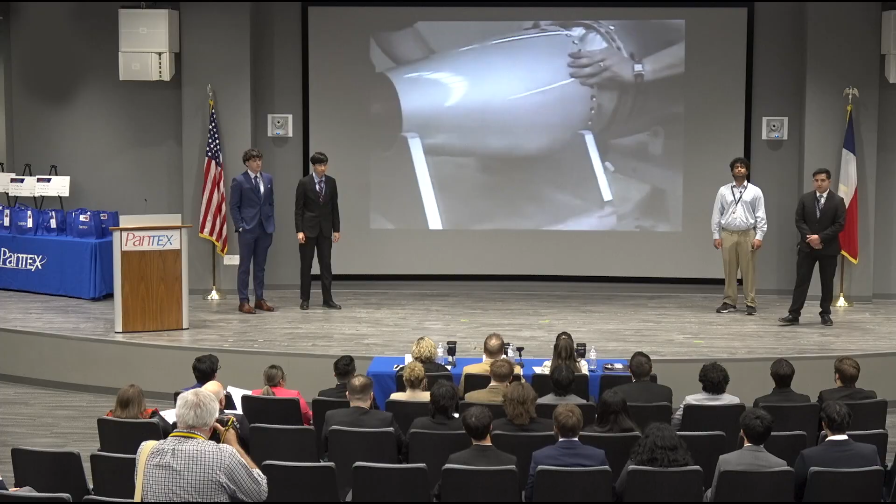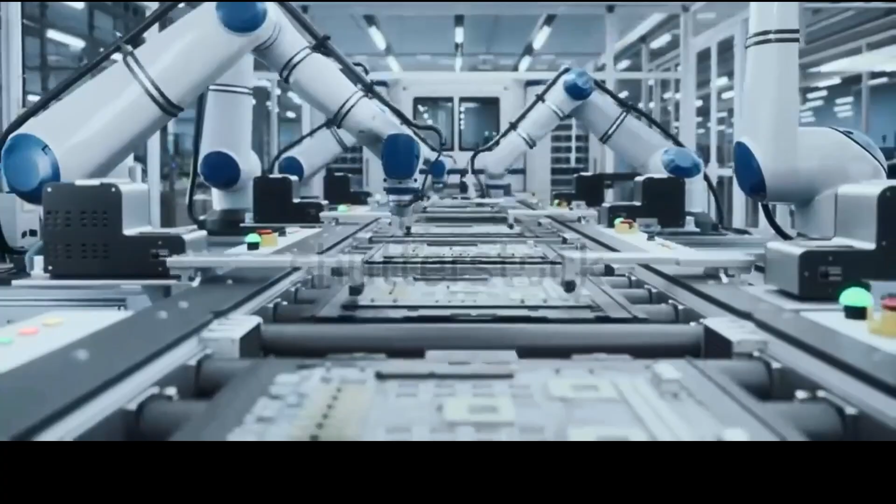Handling high explosives is one of the most unforgiving tasks in the defense industry. There is no margin for error and no second chances. For decades, factories relied on human hands, but even the most skilled operators are still human, slow, repetitive, and prone to error. Humans can only work so fast and with limited accuracy. Even minor errors create bottlenecks, delay production, and limit efficiency. But what if every step could be faster and flawless? Today, there's a better way to protect both people and mission continuity without compromising on control, accuracy, or accountability. Introducing the robot arm. It's a modern way to handle repetitive work in the manufacturing process with unmatched speed, accuracy, and consistency. Our system outpaces human labor, automating movement, minimizing errors, and streamlining workflow for maximum efficiency. The result? Faster production, fewer mistakes, and optimized output that means your team stays in control from a safe distance. Remote operation, full telemetry, instant shutdown, zero exposure, with maximum reliability. Whether your mission is stockpile stewardship, warhead life extension, or final dismantlement, automation doesn't replace the expert. It extends their reach and preserves their safety. National security demands innovation that's not only smart, but safe. You've always protected the nation. Let us help protect the people who protect it.

Howdy. My name is Matthew Valdez. My name is Mohammed Omar. I'm Adrian Montero. I'm Robert Robles. And I'd like to introduce you to Aura, the autonomous unmanned robotic arm.

Whether you're designing high explosive ammunitions or sending up rockets suborbital, you usually want to make sure there's extra safety so you're not risking extra human lives. The issue is an increase in safety usually means your efficiency can start to decrease. What if I told you it didn't need to be this way? What if I told you Aura brings a system of autonomous robotic arms that not only maintains your safety standards, but exceeds them, all while multiplying your efficiency and production rates threefold?

Now, what might a system like this even need to do? Our system, consisting of multiple robotic arms, has many constraints. Number one, it needs multiple fail-safes. For example, if the robotic arm carrying highly explosive material is powered off while carrying it, we need to ensure it doesn't drop it. Second, it must be nationally certified. Third, it needs a dexterous design, meaning it's nimble and accurate. Finally, it needs the strength of at least one human, because that is what it will be replacing.

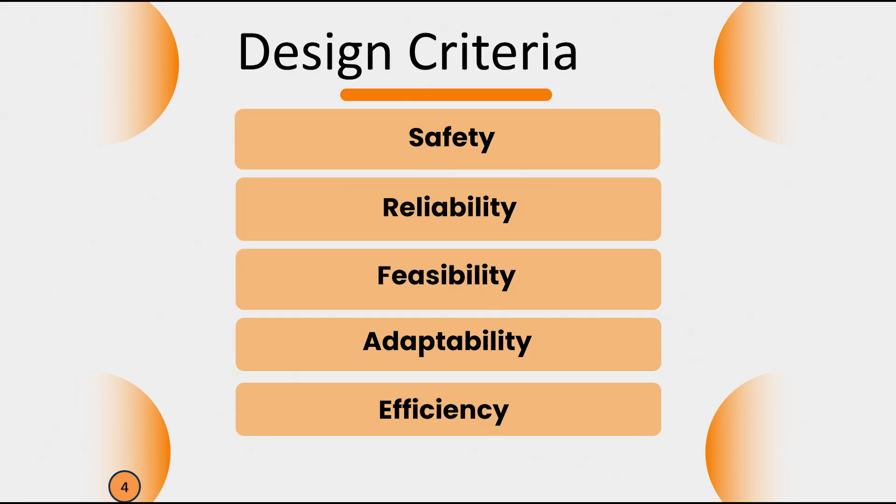So what were our design criteria? Number one was safety, meaning we want to reduce interactions between humans and highly explosive materials, and we're able to get it down all the way to zero. Second is reliability, ensuring these robots can work 24/7, day and night, unlike any human ever could. Third is feasibility, ensuring it's economically viable. Fourth is adaptability, we don't want this in only one part of the facility, we eventually want it in all parts of the facility. And finally, efficiency, these robots will create more parts per hour than any human ever could.

Now let's talk about what Pantex, the integration of Pantex with Aura, and what that could look like on a day-to-day basis at your company.

Our initial plan for Aura is to handle the transfer of raw explosive materials with machines. In this schematic for the floor plan, you can see that Aura has access to the explosive materials and a machine. But before we start with the actual floor plan, we need to talk about how we actually get the explosive materials into the room.

We're aware that Pantex stores raw explosives in barrels on site. So our plan is to get a pallet and load it with the barrels, and then use a human-powered forklift to pick up the pallet and transfer it through the blast door. Then the forklift can leave.

In a maintenance camera, there's going to be an operator always overseeing it, a human overseer, and they'll confirm that no one's in the room. Using a dual authentication system with the forklift driver, they'll both confirm that the room's empty of all humans. The blast door will shut, and Aura can start its procedure.

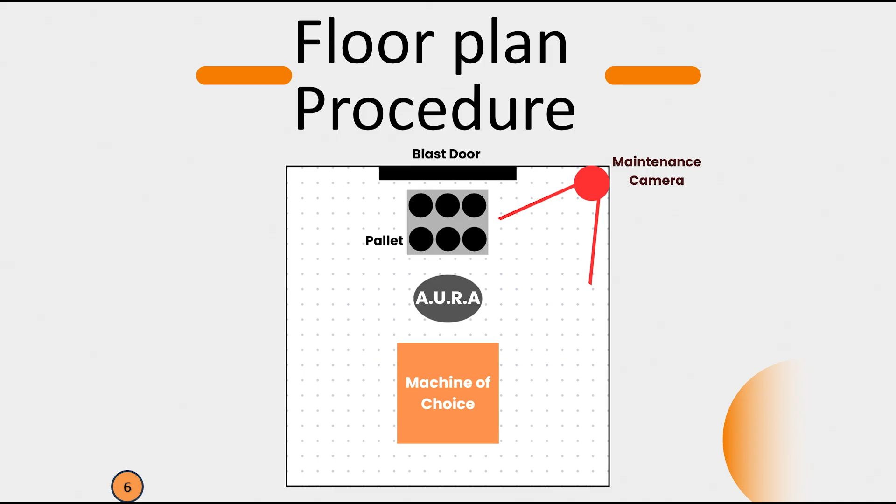Aura will open the lid of the barrel, take out the raw material, put it in the machine, and once it's finished, reload. The overseer confirms each barrel to make sure it's done - kind of like an automatic car wash, with each step being overseen to make sure the procedure is always going smoothly. Then once the pallet's fully complete, the maintenance camera operator will confirm, the blast door opens, and a forklift can remove the pallet and replace it.

The procedure is really straightforward. No human ever interacts with the raw explosives. They're never even in the same room, so it's completely safe.

This procedure can be scaled out, so not just one Aura, but you can have 10, 20, 30, 100. The only real limit is space. And driving out here, we realized space is not probably a huge issue in Amarillo. So the future is really limitless for this.

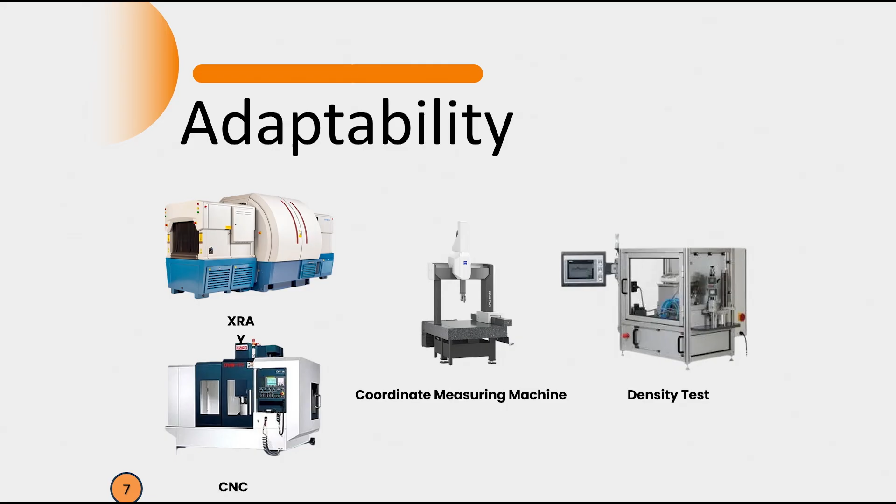You'll notice I said machine of choice. That's because we know Pantex uses a lot of machines, and the same process can be repeated for different machines. So you have your CNC machines, X-ray machines, coordinate measuring, density testing. Any type of machine that Pantex is using can be operated with Aura.

And this isn't just for raw explosive materials. You can also use it for radioactive materials that you wouldn't want humans handling, or dismantling like bombs where you need the precision. We can add multifunctional tools to the Aura arm so that it can do different procedures. We can use automatic transport, such as an automatic forklift that can handle the pallet and place it in a specific place, so you completely remove humans operating that as well.

Because we're handling high explosives, we are going to design the blast room to be nationally certified so it can withstand a blast in case there is an accident. I want to draw your attention here to the increase of safety.

In terms of efficiency, we've spoken with your Pantex experts, and they have said that currently Pantex can develop 50 parts per month. With the Aura system, we estimate, given current industry estimations in other facilities, the part increase can go to 112 parts per month. At each step of the manufacturing of the explosive, we can see a 44% increase of efficiency, which can scale up depending on which sections you decide to automate with Aura.

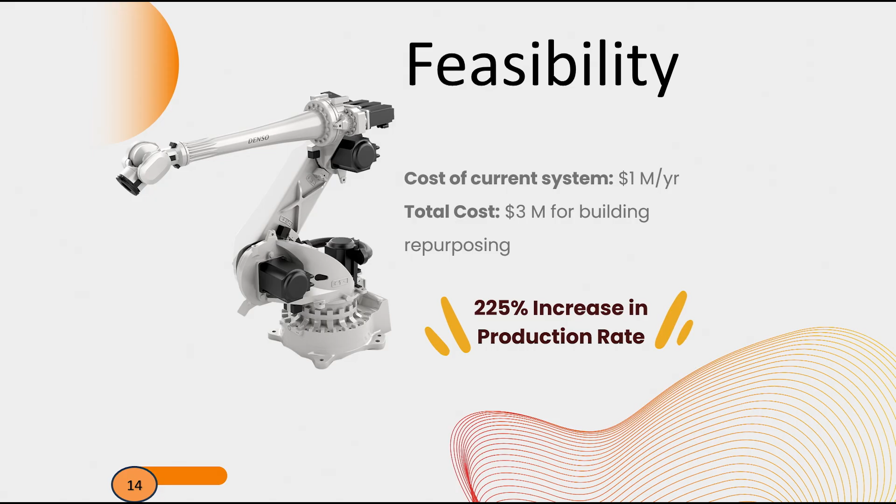Now let's talk numbers. The current system costs Pantex around $1 million per year. Our initial investment for Aura would be around $3 million. While this is a large capital investment, not only would it pay back for itself within 3 years, it will also lead to a 225% increase in production rates.

We've seen that Aura can bring you increase in efficiency, but also adaptability. You as a consumer can choose to put this wherever you'd like, whether it be in the CNCing process or coordinate measuring machine. If you're not comfortable with it being in a step, you do not need to put it there. However, every single step you introduce will increase your production rate more and more. Not only that, there is already an increase in safety and consistency to make sure that no incidents can ever happen with these high explosives.

Now, knowing all of this, I ask you one question: why not Aura?

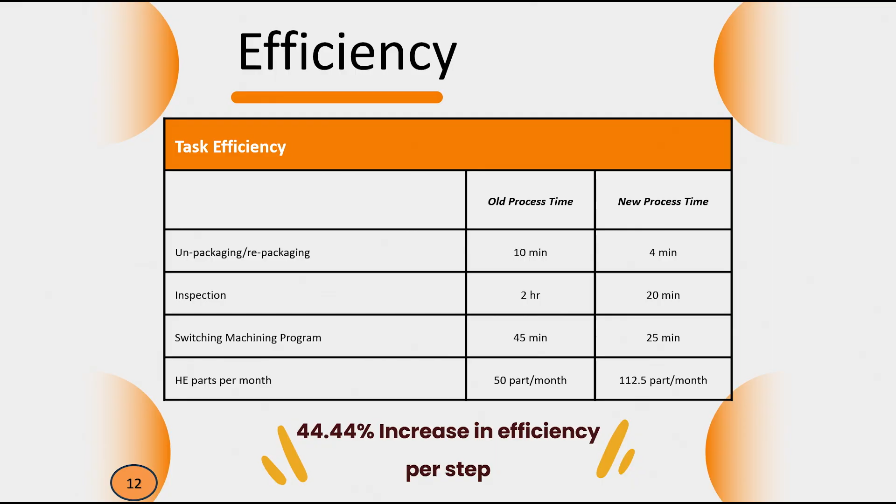So following on that, your presentation talked about an efficiency gain from a time perspective—how do you gain that time efficiency in inspection? Right now the efficiency comes from production; the explosive enters the room, is produced, and the inspector remotely operates a camera to view the part. We accounted for the inspection to be done within the limits of the camera scope. We targeted 4 different steps to look at this 44.4% increase, looking at industry trends from automotive, manufacturing, and food. There were 4 main things a robotic arm was especially good at, and we measured how much it decreased each by. Adding those up gave us a 44.44% increase per step. The inspection gain also comes from accounting for the coordinate measurement machine and density tests—the human doesn't have to unload it, program it, and track down the data, because the machine can be wired to the control panel so the operator can write down the data directly. That way there's no security issue from anything going wirelessly; there's still a cable running from that machine to the person controlling it.

You may have noticed Pantex, except for this building, is kind of old—the facilities are a bit older, so power distribution, electrical, that kind of thing. What are the requirements if you wanted to put more than one in a room? How are you handling power to keep everything up and running—is there a power supply in case you had to operate that way? Well, it can run off of whatever power grid you'd like, or off a generator, and it also has its own built-in battery system in case the grid goes off, though we heard that's not really a big issue. In the event it could happen, it has a built-in backup generator to make sure it can complete its tasks and shut down efficiently without any mishaps.

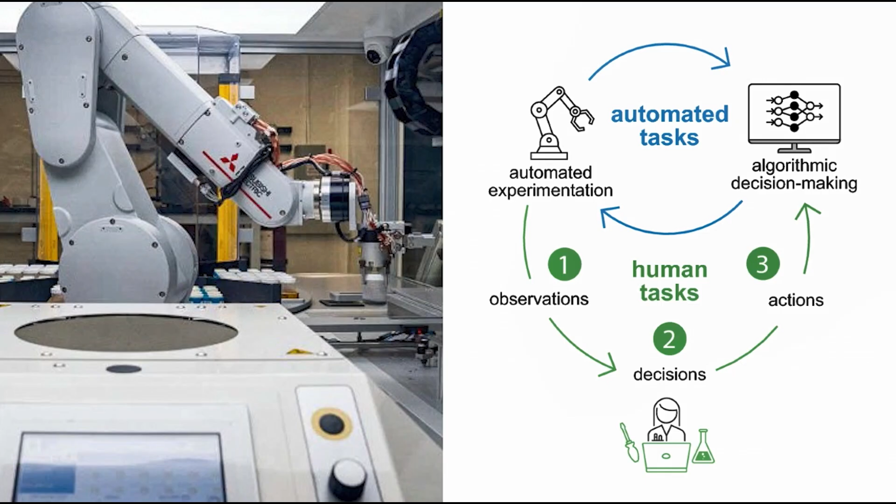We are AutoChem Analytics. Our self-driving laboratory integrates custom hardware and software centered around inline monitoring to optimize your synthetic processes, ensuring a reduction in hands-on operation while increasing the confidence level of your product quality for pilot and industrial scale applications. Our mission is to influence national laboratories to initiate AutoChem implementation into industry standard. AutoChem, let's get in line.

Good morning. I'd like to set the stage for you. Let's imagine that you're an engineering technician working at Pantex. You're working in the high explosives manufacturing unit on the synthesis team. Every single day, you're working hands-on with these batch reactors, and this creates an immediate danger to you.

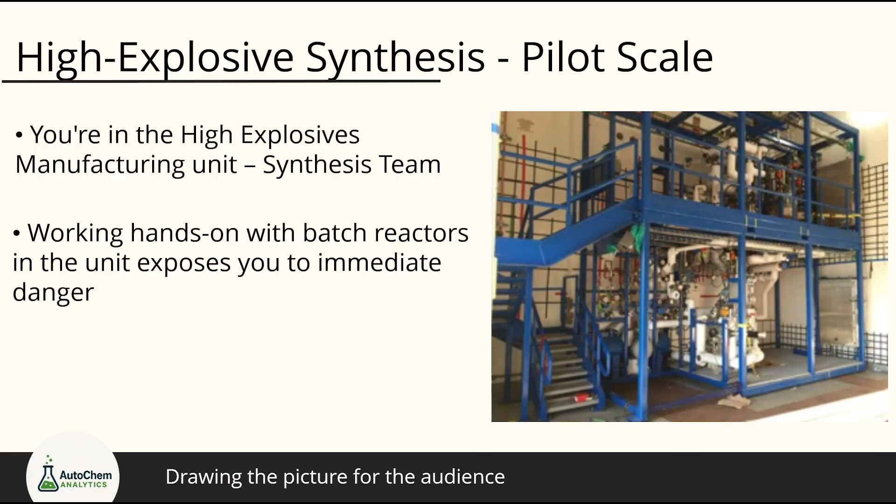You constantly feel the subtle vibrations of these reactors under your gloves. You're smelling the chemical tang all around you, and you start to wonder, maybe this is a day-to-day deal, maybe this is the norm. But am I really safe behind these blast-proof walls? Sure, they protect everyone outside of this room, but what about me inside? Am I really safe? What if one of these reactions spirals out of control?

We are AutoChem Analytics. We specialize in custom design of your synthetic processes needs.

We are addressing clear and prevalent issues. We just walked through a scenario where multiple different failures and problems could have arisen, and the reality of a huge risk being managed is a reality to many. Now that we've presented it to you, it is in the back of your minds as well. With that scenario in mind, let's take a step back and look at the root problems of what we're trying to solve here and analyze.

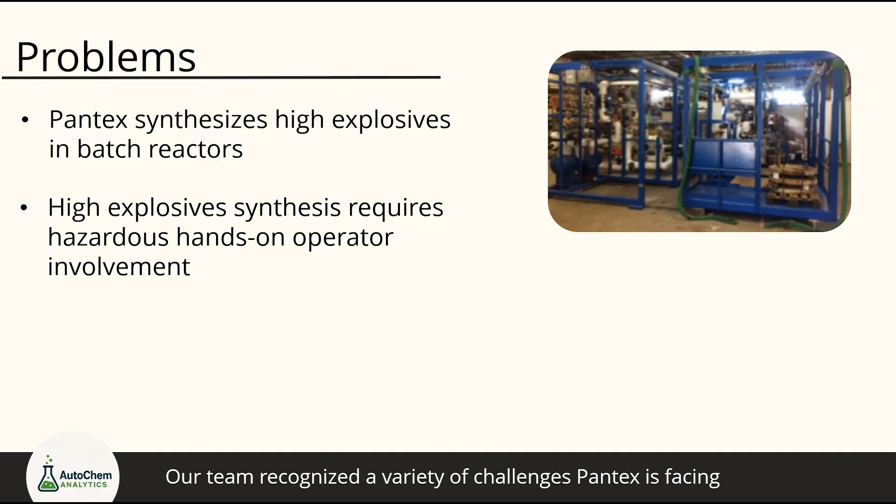The first problem I'd like to address is that Pantex synthesizes its high explosives usually within batch reactors. This immediately causes a risky scenario as it generates and establishes a high explosive area. This directly ties into our second problem: at this moment in time, there's continuous need for hands-on operation and work within those high explosive areas. Technicians are required to manually control, monitor, and change the process with very little physical separation between themselves and the energetic material. These risks are not theoretical, they are daily, and with this current setup, they are unavoidable.

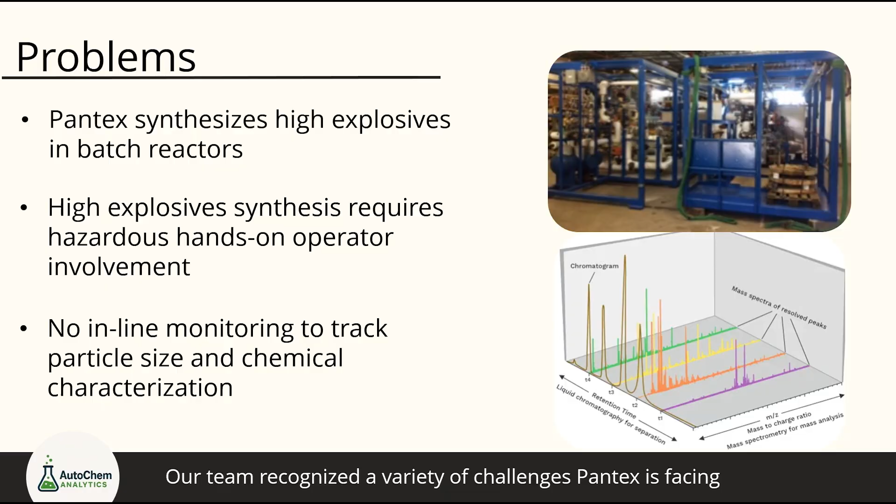Finally, our third problem: there is no inline monitoring to track key parameters within the synthesis, like particle size and chemical characterization. Operators have no real-time feedback on reaction behavior or product quality. All of these changes will go unnoticed until after the batch, prompting reactivity instead of proactive control.

What we're proposing as a solution to this is the idea of a self-driving laboratory. This has been around in the research space for quite a long time now, and it's usually done at small scale. You can think of this analogous to a self-driving car. There's a driver who's in control, making decisions, but all of the gross mechanical needs are taken care of by the computer and the mechanical system.

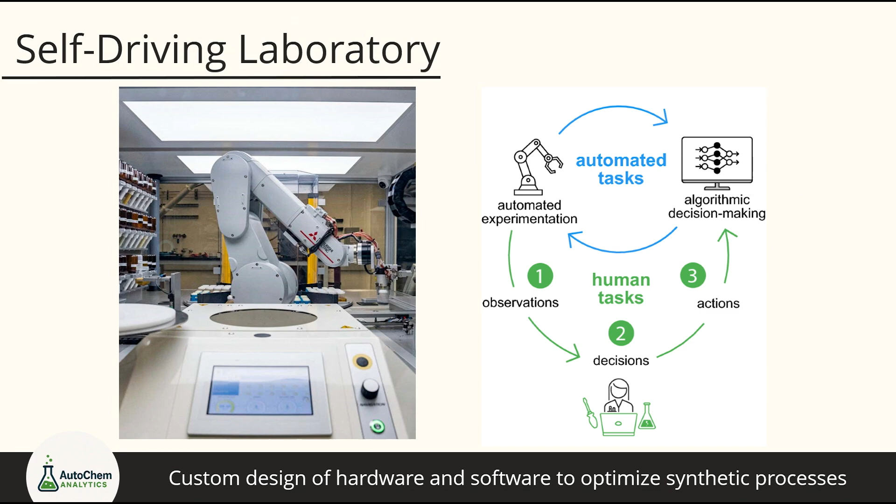Ultimately, you want to get to your final destination safely. If you've ever driven on the road, especially in an urban area, you might realize that a self-driving car is actually a little bit more unpredictable than a synthetic lab. Synthetic labs can be safe as long as we have proper preparation, safety things in mind, and we continuously monitor it. We can predict these things.

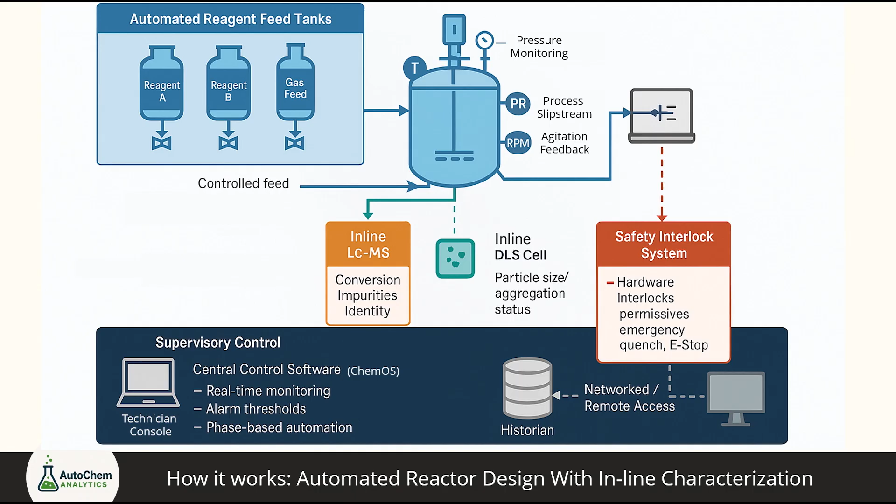This is a software solution with hardware design in mind. Once the reaction is started, you will have constant monitoring of pressure, temperature, the things that you would normally monitor as a technician working directly with batch reactors. But this would be done completely remotely, on a remote system where the engineer is removed from the dangerous situation.

In addition to this, what we're really excited about is inline monitoring. This includes particle characterization, size, as well as chemical composition by using LCMS. Using this remote system and computers, we can also have a variety of safety interlocks that are all managed by the software, which is ChemOS. It's already developed, and we will design it for your system specifically.

So how do we do that? First, we'd want to consult with your engineers, staff, scientists, and we want to know exactly what you need. We can achieve any synthetic process automatically if we know what you have in mind. Once we know that, we can design and mock up the system. Once we've done that, we would meet again with your engineers, staff scientists, and other stakeholders to ensure that what we're doing is matching your needs.

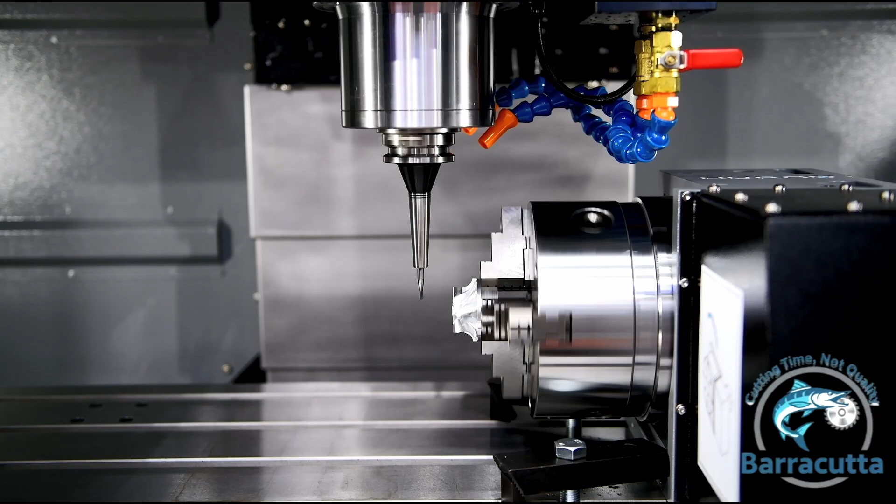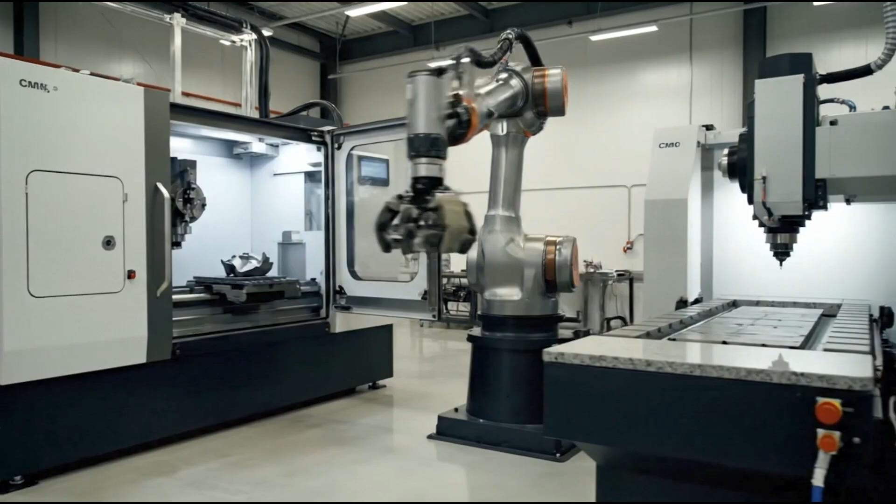Barracutta addresses this need for efficiency by cutting out over 50% of human interaction with high explosive machining. We've implemented automation to the CNC process through combination mill and lathes to reduce transportation between machines, and a programmed robotic arm to move high explosives throughout the process. Our solution would decrease steps in the CNC process, increase the speed of production, and streamline the process further.

Efficiency affects all Americans, and it starts with Barracutta at Pantex.

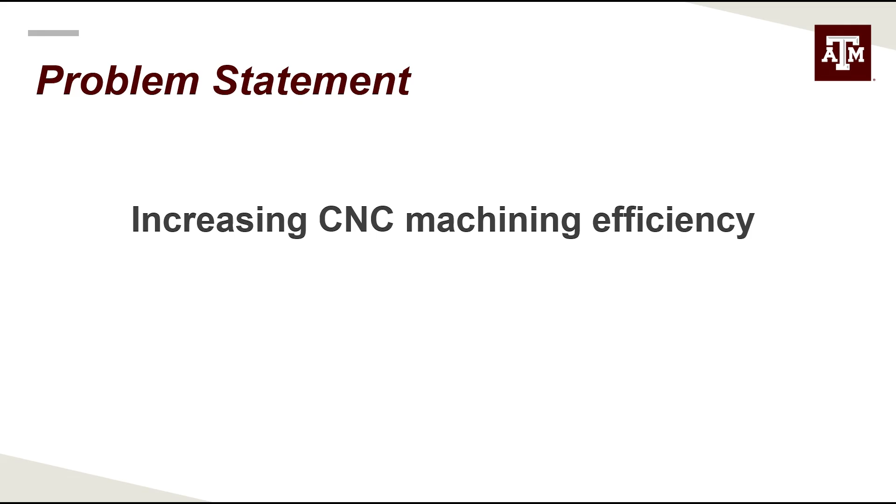Howdy. We are Barracutta, and we're here to cut down on CNC manufacturing times for high explosives without cutting quality. Our core problem is that this current CNC manufacturing process for high explosives has several inefficiencies. Our goal is to locate and eliminate these inefficiencies to help streamline the process.

A few weeks ago, during our customer discovery phase, we got the opportunity to talk to several Pantex employees, specifically about the current CNC manufacturing process for high explosives. It's a long and slow process, but ultimately, it's inefficient. Our team took a look at this process and found 5 design criteria to help guide our solution and streamline the process.

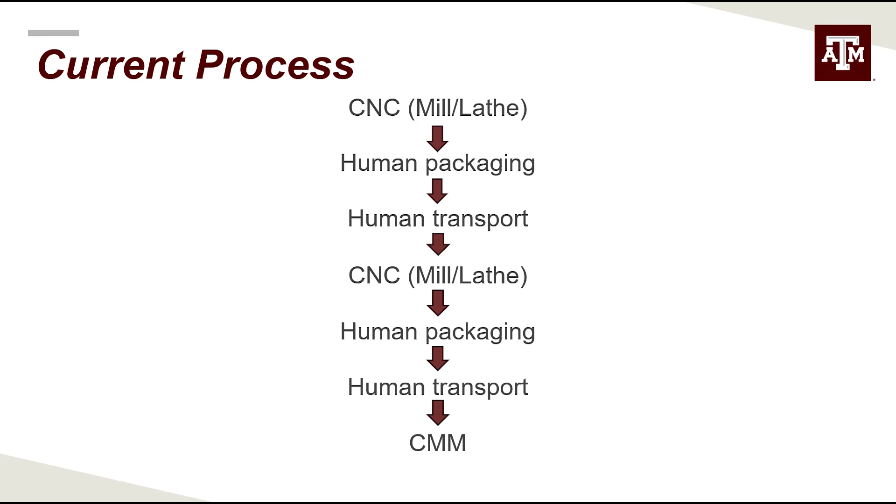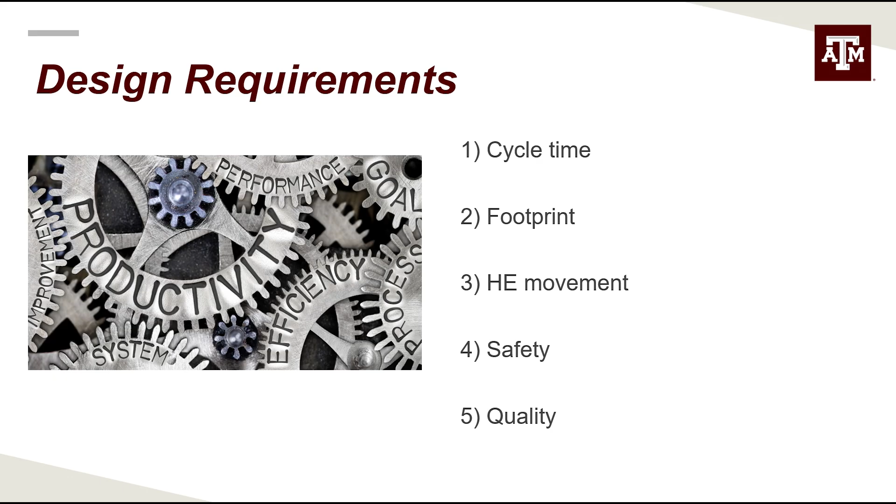After our customer discovery, we found any viable solution needed to meet the following design requirements: cycle time needed to be reduced by 25%, machine footprint reduced by 1/3, and the transport of high explosive materials reduced by 50%. Additionally, we would maintain Pantex's accident rate and defect rate of 0.02% and 0.74% per 100,000 work hours respectively.

The first solution we considered was a laser grid inspection system. This would replace the need for a CMM and reduce steps in the process. Next, we considered a smart can and tracking system. This would partially automate the packaging time and reduce steps overall.

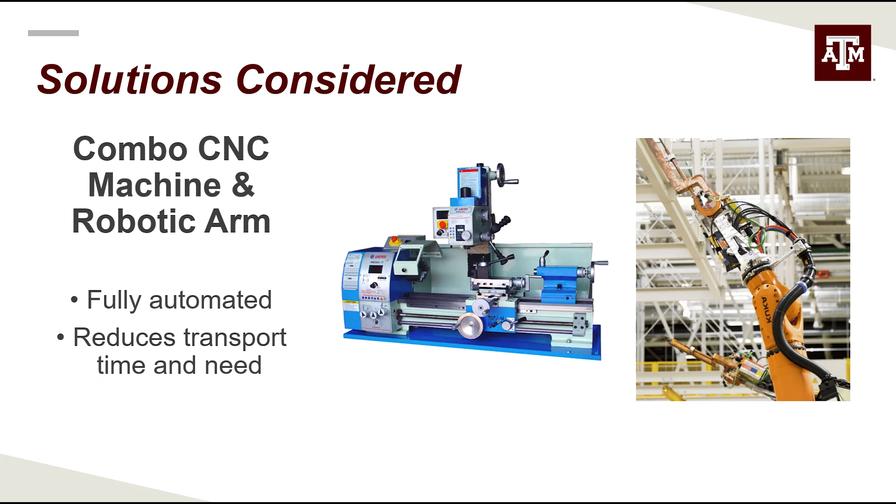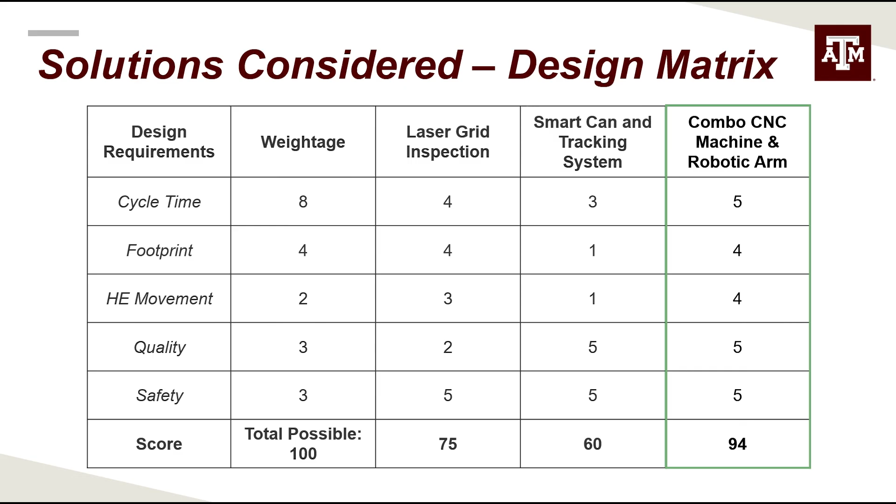Finally, we considered a combo CNC machine and robotic arm. This would fully automate the CNC process and reduce the need for transport and transport times as well. After weighing each of our solutions against our design requirements, we found our solution, Barracutta, would be the combo CNC machine and robotic arm.

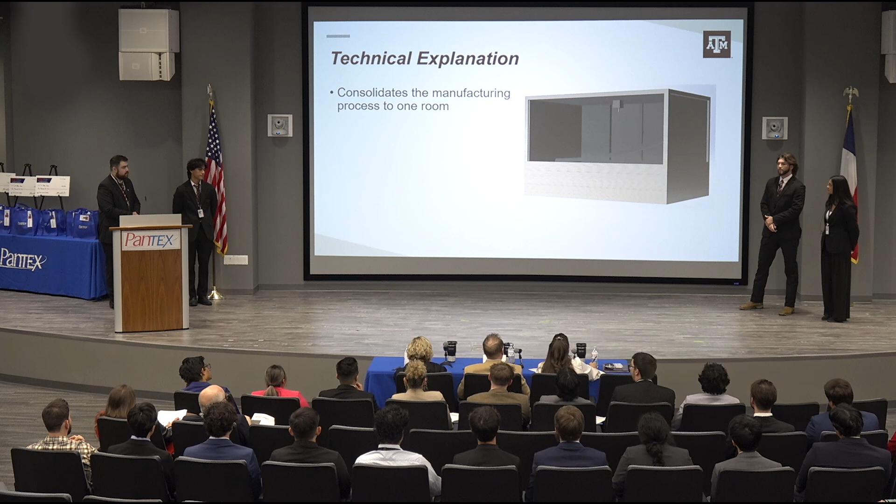The Barracuda system combines 3 machines that were once originally in 3 separate rooms behind 3 blast doors into 1 room behind 1 blast door. This greatly reduces the amount of human interaction with high explosive materials in the overall CNC process.

The first machine is the combo CNC mill and lathe. The mill is featured at the top and the lathe on the right, which is able to function along a track, allowing you to cut at whatever angle is necessary for your given part.

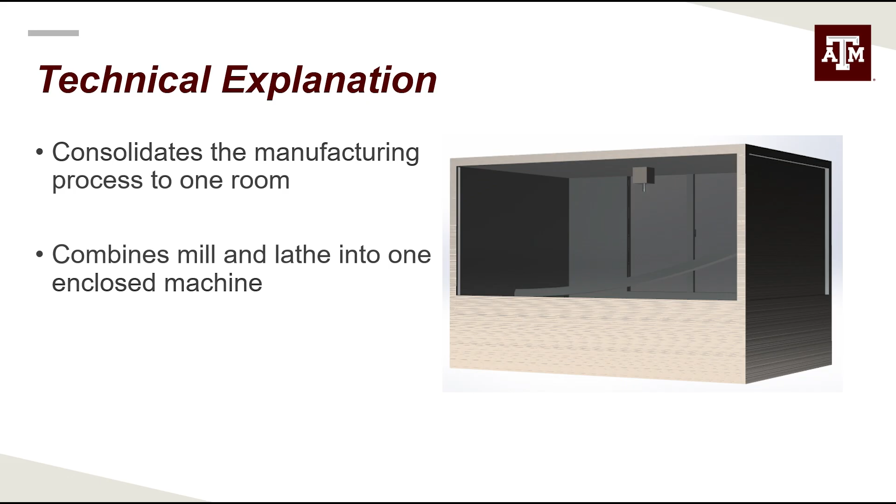The next machine is the robotic arm that utilizes water-aided vacuum suction in order to transport the material from the CNC machine to the CMM. And I know what you're thinking: what if the robotic arm drops the material?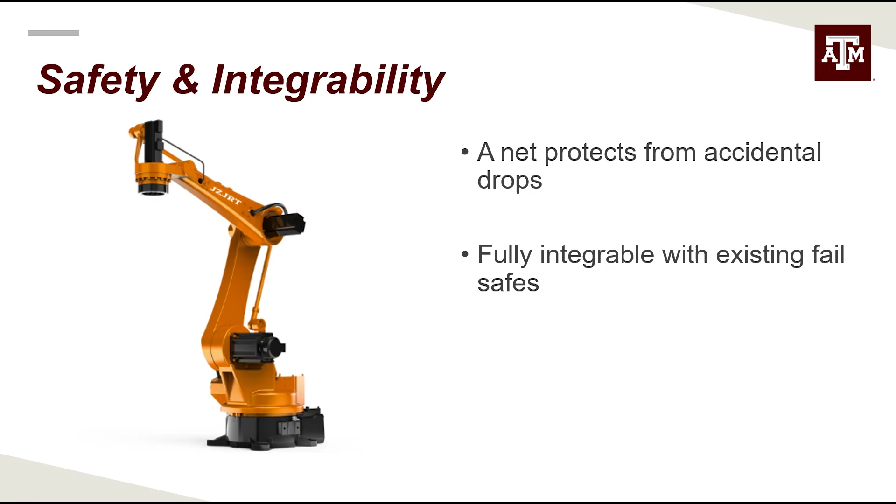Well, per DOE standards, the Barracuda system is fully equipped with a safety net, meaning that if the material is dropped, it won't be damaged in the process. The Barracuda system is also fully integratable with all of your current fail-safes, meaning that if water gets cut off or power to the building is shut off, the whole system shuts down, someone can enter the room, fix the problem, and then leave.

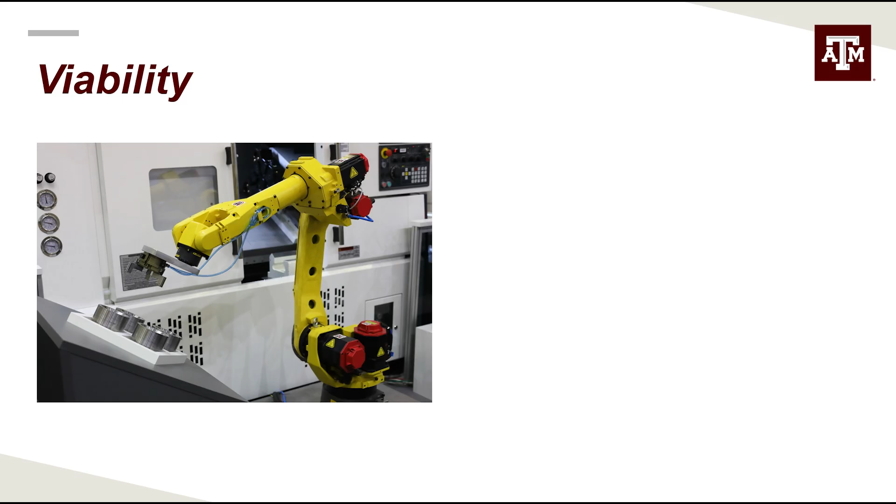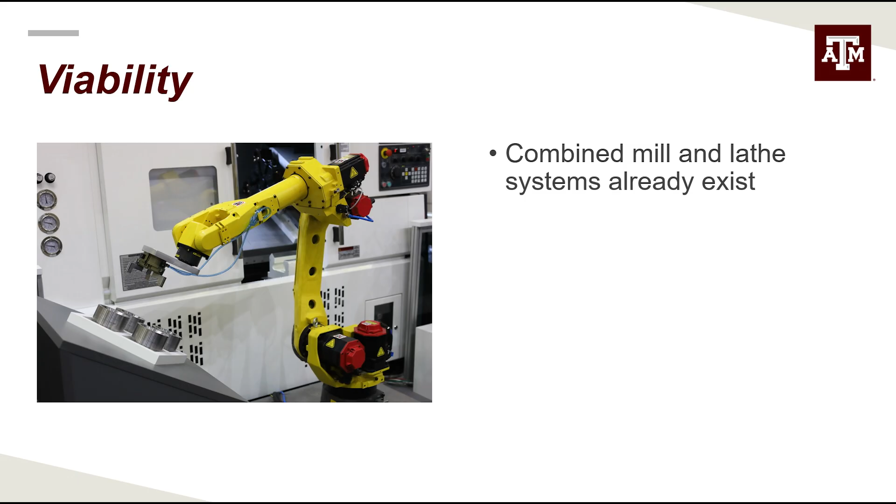The Barracuda redesign is ambitious, but it's also viable. Combination CNC mill and lathe machines already exist and are used in manufacturing. The main difference with ours is that it's fully enclosed and compliant with DOE safety regulations.

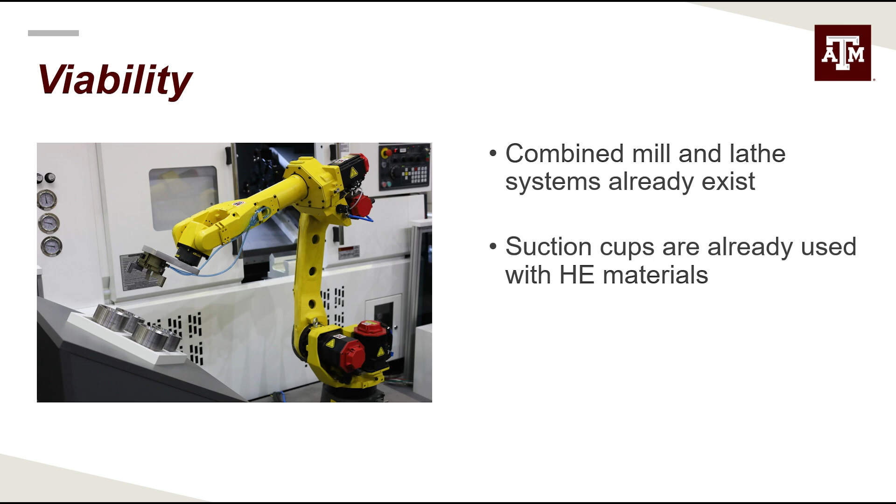Additionally, water-aided vacuum suction is already used to handle high explosive materials during the CNC machining process, making it a safe and reliable method for a robotic arm to utilize when transporting these materials. Robotic arms are also frequently used in manufacturing as a tried and true method to reduce human interaction in the manufacturing process.

The Barracuda system has a tremendous impact on the efficiency of your CNC machining process. We estimate that this system will save an estimated hour per part manufactured by entirely eliminating 2 human packaging and transport steps. It also decreases the transportation distance of high explosive materials and decreases the machining footprint, allowing you to increase production with the space you already have.

What do you say to swimming with the Barracuda? Thank you, and any questions?

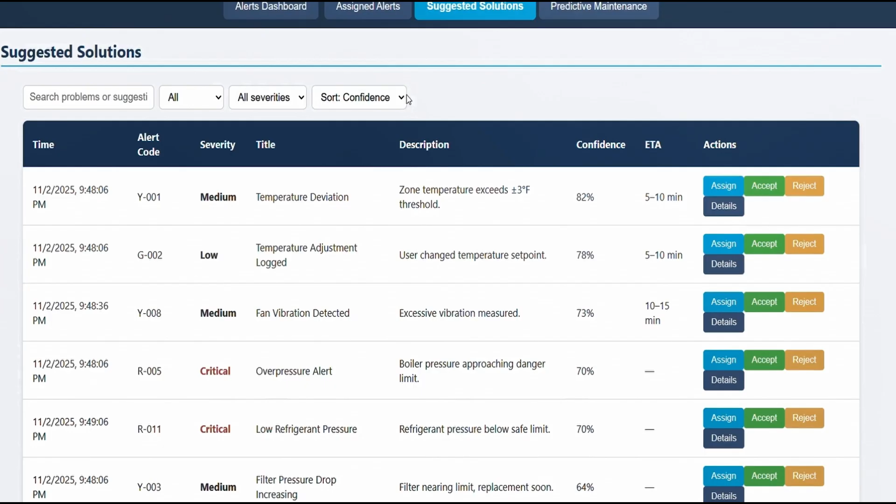Seamlessly integrated with IntelliWeb, Intella AI provides a smart dashboard that visualizes system health, predicts failures, and reduces alert noise. The result? Less burnout, faster response, and smarter decision-making. Because here at Intella AI, we're all about real-time intelligence and real-world impacts.

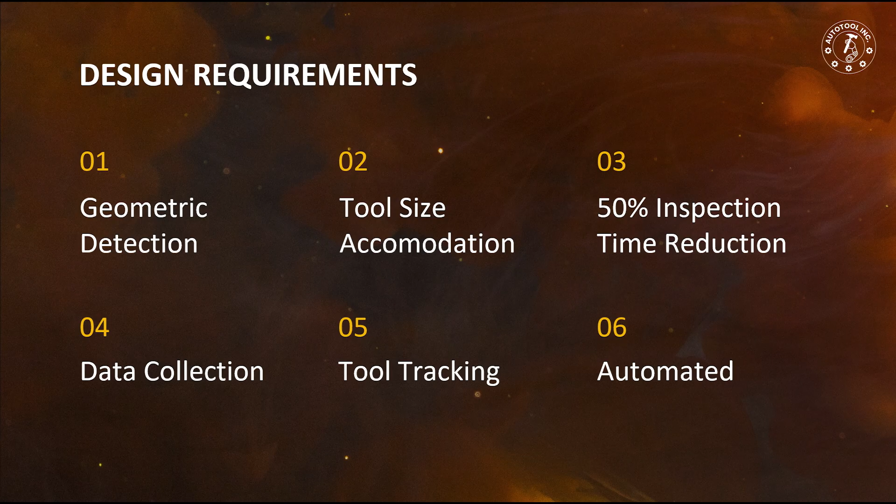So as we approached this problem and tried to solve it, we felt that the first obvious solution was a CMM machine. But upon further investigation, we didn't really feel like it got to the root of the problem at hand. So we went back to the drawing board and came up with 3D photographic scanning and autonomous humanoid robotics. But again, none of these really got to the root of the issue. So in a bold move, we decided to combine all 3 into one complete system.

Meet AutoCMM. So picture this: you're in the tooling inspection part of the Pantex plant. A number of tools come in on trays into our system, and then an autonomous robotic arm will pick up each tool and place it exactly where it needs to be in the staging area.

Next, we'll use an AI computer vision model to detect exactly which tool is being inspected at that moment. Then, using that data and comparing it with the CAD file, our CMM will come in and test tolerances up to 1/10 of a millimeter at various different points of the tool. From there, we're going to track that in your existing enterprise resource planning software, SAP, and then we're going to use the autonomous robotic arm once again to place it in either a pass or fail line.

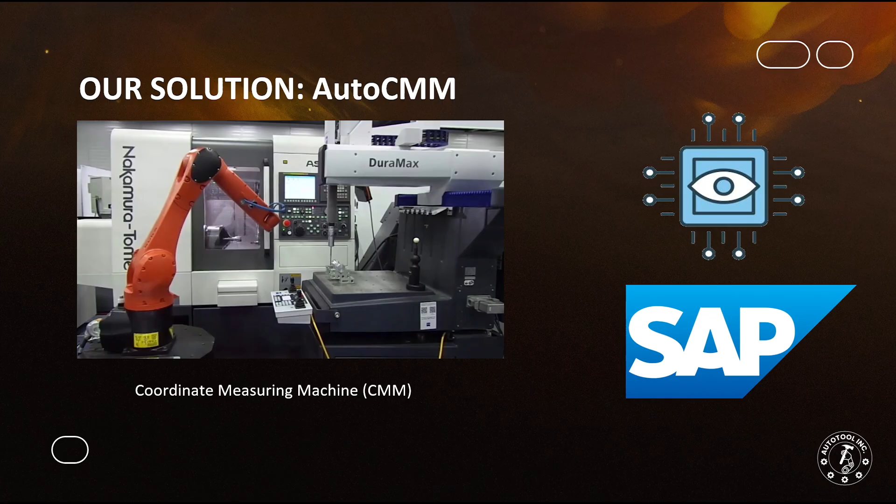We plan to use AI not only to detect which tool is in the staging area, but also to detect trends over time. So let's say one week we have this part that has 0.01 tolerance, then later 0.05, and then even later 0.1. You can see there's an obvious trend over time, and we want to predictively pull these tools and parts out of production before they cause real issues.

Thanks for that. Let's see, I wanted to double check on scaling from size back and forth to size of different tools and how quick that can happen, and if there are any limits that you guys realized you're going to have.

As I've said, it's going to be an 8 cubic foot area. We talked to some of your coworkers and employees, and they said 80% of tools will fit within that. So scaling wise, a lot of your tools will fit.

A lot of the tools have pretty unique features, and some of those might be hard to see or hard to get to. How is it going to maneuver? Is it an entire tool that goes on this device, or is it piece parts of a tool that go together later? It would be the geometric tolerances of each of the pieces of the tool, so there would be some disassembly required in the beginning, so we could track each piece of the tool individually and replace them as needed.

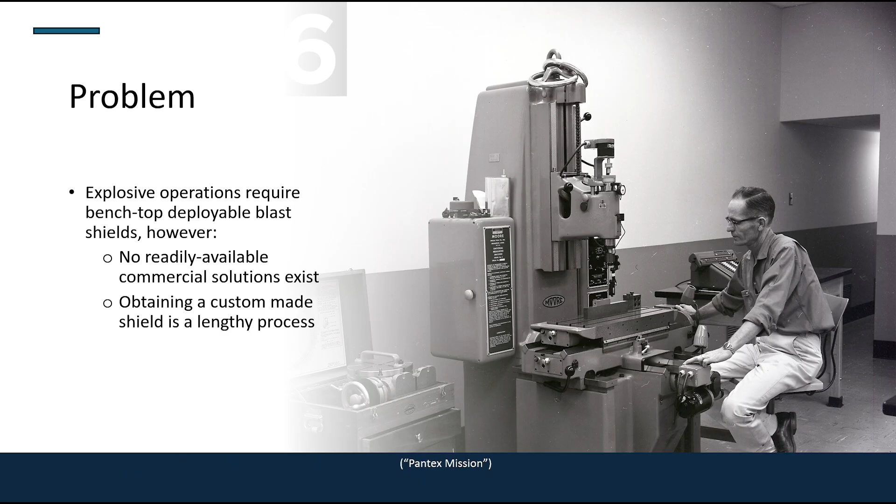However, we wanted to dive a little bit deeper, which brings me to our customer discovery. In our customer discovery, we found that there were two main issues that our customers faced. Number one, who likes to do paperwork? No one? Of course not.

Now, I mentioned that there's only one commercially available option on the market, and that these custom shields are, put bluntly, a pain. Well, Pantex has over 150 unique pieces of lab equipment. That's 150 vendor vettings, 150 product testings, 150 product requisition forms. That's a lot of paperwork, and rightfully so. Security, integrity, and safety is everything here at Pantex.

With that in mind, problem number two, Pantex has land, funds, resources, but no grant can give the one thing needed most: time. You can put up a laboratory, you can put up lab equipment, but how quickly can you put up a blast shield? How quickly can you even obtain one? How quickly can you ensure to your technicians that they will go home to their loved ones tonight? That being said, I present to you our solution.

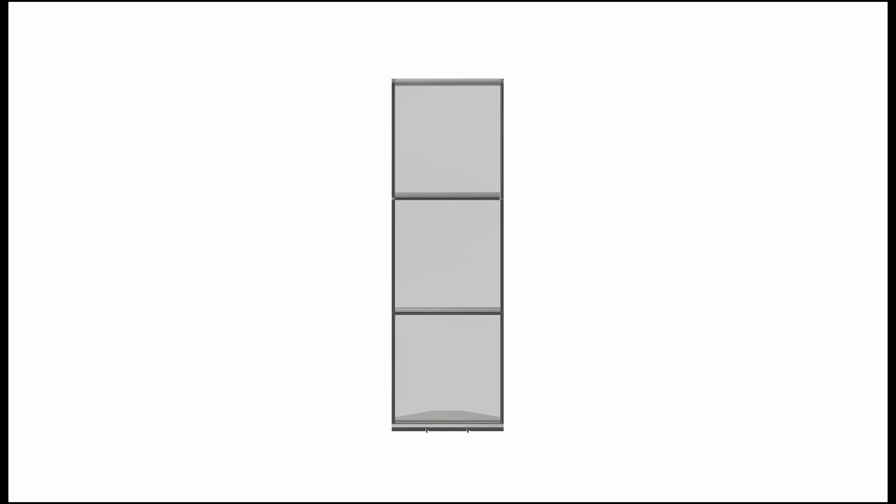Built from dual polycarbonate panes and infused with non-Newtonian fluid, Ring Shield is reinforced with steel T-slot framing, delivering protection that adapts instantly to any environment. Non-Newtonian fluid hardens instantly with every collision, dispersing energy with every strike. So why is it that when you mix water and grains together, they suddenly get so strong? You would think, if I hit it really hard, I'm going to break it. This is a fluid normally, and if I hit it hard, it turns into a solid.

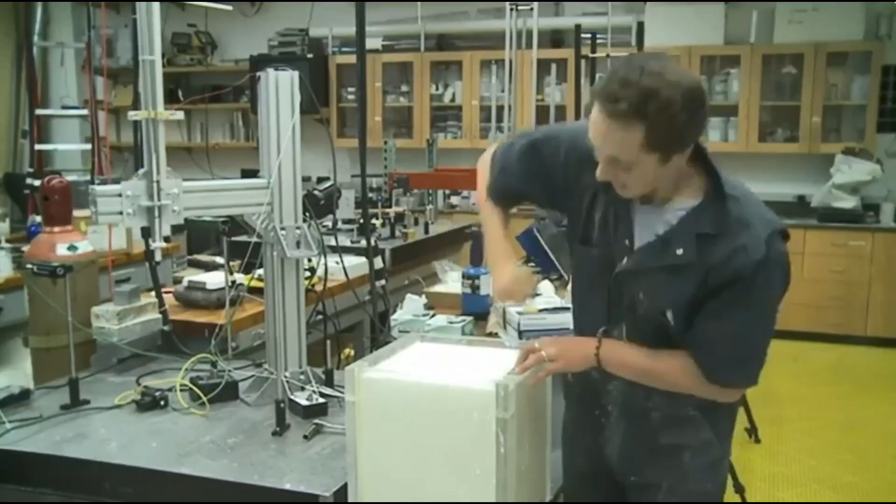While dual polycarbonate panes add extra layers of strength, giving you unmatched impact protection. With a design built for real-world use, 4 times the shock absorption of a normal shield, less than 1 hour assembly time, and one kit consisting of a 3-pane, 1-base system can be moved by just 2 people, so no extra moving equipment is required.

Lock it, expand it, move it. Ring Shield's T-slot framing system and clamp base let you build protection your way. Ring Shield stands ready when it matters most. Ring Shields, protecting those who protect us.

This is the Ring Shield. The first thing I'll point out is this flared base. This base is weighted, meaning it's suitable for indoor and outdoor use, and ensures the shield stays a shield and does not become a projectile.

Now onto the pane itself. The pane has 3 layers: two 1-inch thick polycarbonate panes with a non-Newtonian fluid in between to increase blast absorption.

Now I'd like to show you all my favorite part. How many of you have ever bought those little magnetic building blocks for your nephew, a kid, or yourself? I'm not judging. Well, what if you could customly assemble a blast shield with such ease?

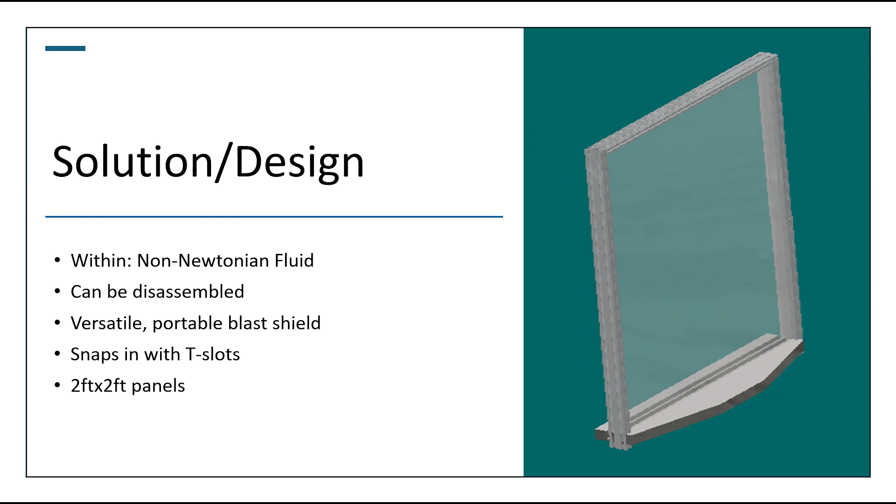The aluminum frame has T-slots attached on each side, top, bottom, left, and right. Meaning not only is this base detachable, but you can easily snap these panes in and out to one another. We ran these T-slots and joints through an AutoCAD simulation to ensure they would not be weak points.

So you want a custom blast shield? You can make it. You want a 2x8 blast shield? You can make it. You want a 16x32 blast shield? You can make it. You want a blast shield in the shape of a double T? You can make it. All with one product, one vendor vetting, one product testing, one product requisition form, one Ring Shield. We estimate that from box to fully set up, it will take under an hour.

Now, safety is our number 1 priority. So we consulted the Department of Energy Safety Standards Handbook, specifically chapters 12 and 17. We figured they might know what they were talking about. We meet the requirements for a Class 1 safety rating, meaning we can account for overpressures greater than 5 max PSI effective pressure. We can ensure that structural collapse is not a possibility, and we can account for fragment and debris as well as thermal flux.

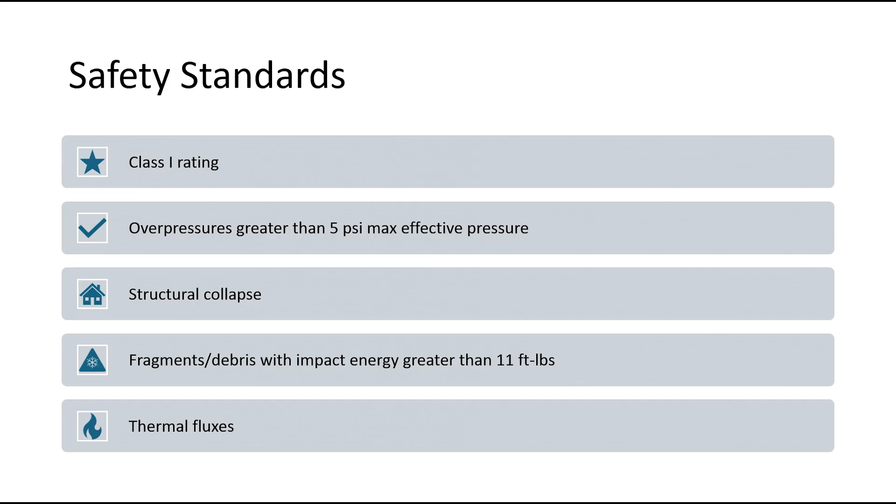I'm going to pass it over to Ethan to tell you all a little bit more. Thank you, Winnie. Hey everybody, my name's Ethan Rojas, and let's just jump right into the customer segments.

Now, our number 1 client will be Pantex. However, our number 1 customer will be the Explosive Technology Senior Director, Monty Cates. He'll be the one purchasing our product, however he will not be the end user. The end user will be the explosive technicians, and those will be the lives that our product is protecting.

Looking to expand it even further, we could go to other explosive labs facing a similar problem as Pantex, like Sandia, Livermore, perhaps even the DoD. To expand it even further, we could go to other universities, factories, perhaps even local gun ranges — anywhere where you have explosives and fragments flying in the air and you need to protect your people, we can be there.

We did a small market comparison analysis in Pantex, and we noticed there's only one other competitor other than their own custom blast shields, and that was Total Shield. Total Shield uses a 1-inch thick polycarbonate pane. We're using double, and with the non-Newtonian fluid added, we have quadrupled our shock absorption.

It takes Total Shield 4 days to get their product up and running and ready to go. It takes us, as Winnie stated before, under an hour to get our product of a similar size up and running and ready to go for the field.

It is $4,000 to $10,000 more costly to go with Total Shield than it is with us, so we are much more cost effective. And although Total Shield sends their blast shields out in parts, once it's all fastened together, it is a lot harder to take it all down and put it someplace else. Ring Shields is faster and easier to disassemble and assemble, only in a matter of minutes.

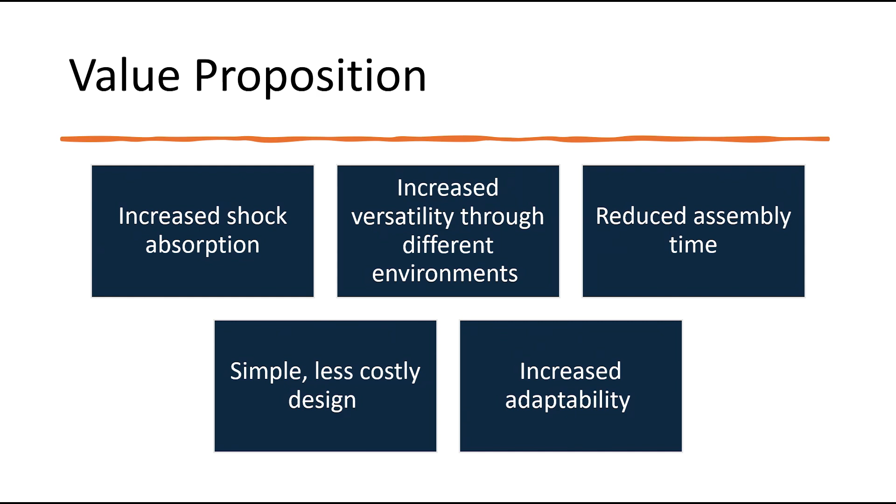We're also very adaptable. We can go on the field, in the field, out the lab, in the lab. We can build upwards, sideways, diagonally. The sky is the limit.

Not only are we saving you money on the front end, but we're also saving you time, and we all know time is money, with the reduced assembly time it takes to make these blast shields. We're also very versatile — you want us on a bench, on a table, out on the field, or even on the cold floor. Wherever you want us to go, we can be there.

As for our next steps, we plan on commencing our first phase testing, then moving on to our design and manufacturing, and then expanding our customer base. Thank you very much. These are our members, and we are Ring Shields.

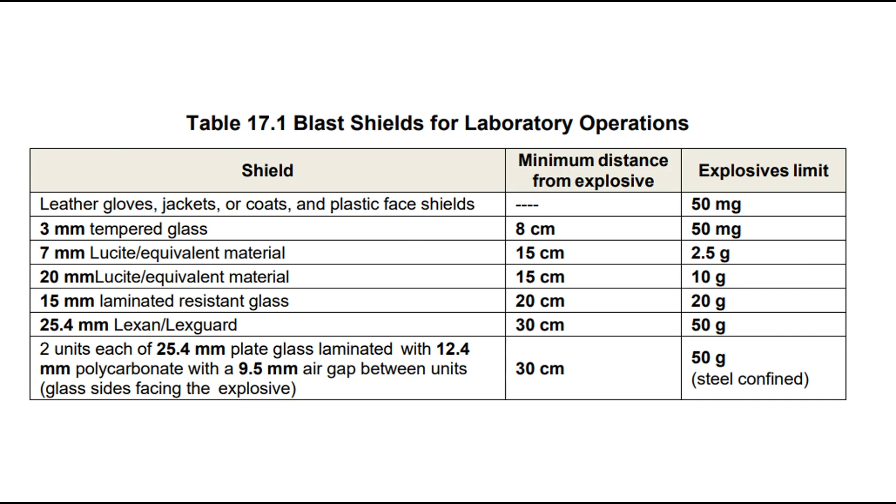Is it primarily designed to shield against fragments, or are you intending to shield against the shockwave itself? I love that question. If you go to the next slide, here we used table 17.1 in the laboratory operations, looking at the very bottom. It states for 2 plates of polycarbonate with an air gap in between, rated for a steel confined 50 gram explosive, that is the worst possible case scenario, and that's exactly what we designed for. But without the air gap, we're replacing it with a non-Newtonian fluid, which is our novel idea. The specific non-Newtonian fluid we chose, polypropylene glycol with a fumed silica mix, when exposed to heat in the incident of a blast, turns into a gel, which would additionally account for fragment and debris as well. So it works in the case of both settings.

So if I understood correctly, the shield is just held in place by the weight of its base alone. Do you have any attachment capabilities? And if not, what is the maximum kinetic energy or shock you can take without tipping it over? I'm very glad you asked that, I actually left that part out. The base does have retractable clamps within it, made to attach onto any benchtop or other surface you have.

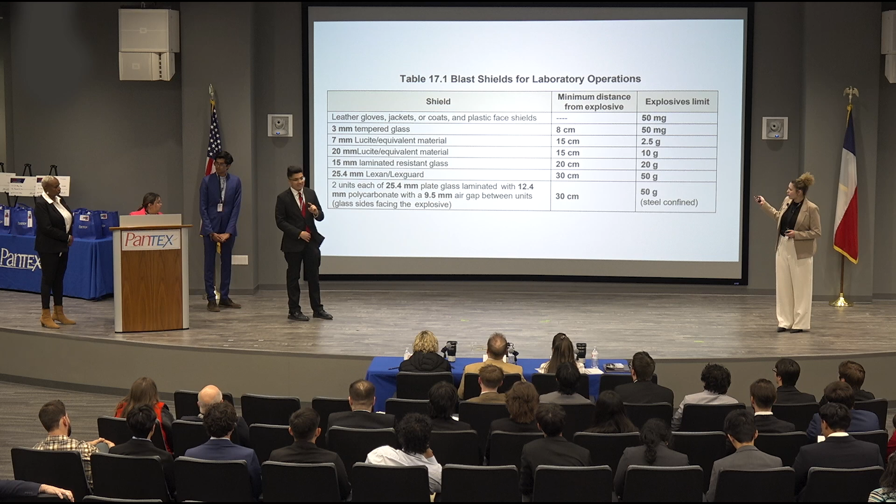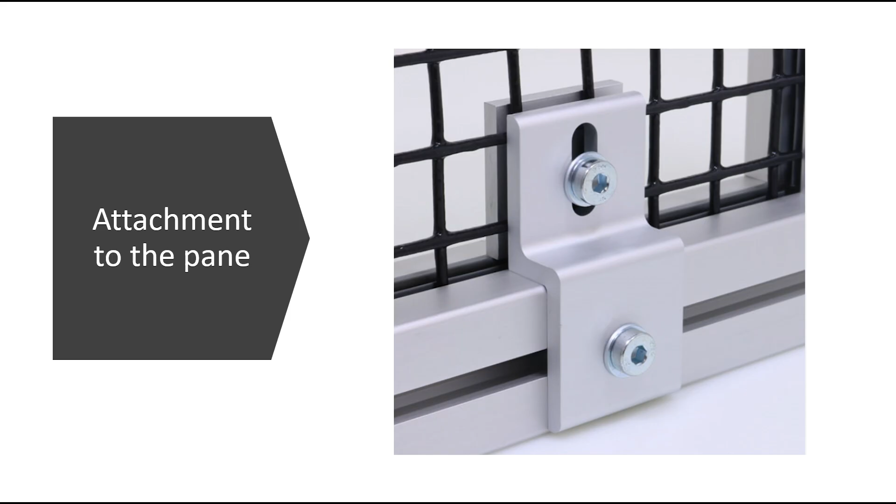And do you know what those clamps are rated to in terms of force before failing? If you could go to the next two slides. So it's using gusset plates to attach to the polycarb, and we're using high-speed steel to drill out these holes. With these gusset plates, we noticed we're using tested materials already. We have yet to test it ourselves, but we're using tested materials. Actually, Total Shield uses a similar attachment to their plates, but theirs aren't as strong and beefy as ours.

I'd like to add to that. In addition, on the bases we're using T-slot clamps, which means they're modular, and if you have a greater blast and need more added weight to support the shields so it doesn't become a projectile, it stays more modular and fit for any environment. We've also added a function where the bases can slide and clamp into each other to help with stabilization for greater blasts.

Talk a little about the shelf life and maintenance, and what happens if — hopefully it's never going to be used, right? But what should people look for in terms of knowing when to replace it because it's too old? Can you pull the material out of the T-slot, that kind of thing? How far did you guys get on that part?

These are designed to just stay there — you put it in place, and if you want to move it you can, but there's no degradation of materials, because it's made out of aluminum and polycarbonate, and with the non-Newtonian fluid we don't have to do any maintenance whatsoever. It can just sit on your shelf and stay there. In addition, the steel material we're using, ASTM A572, is a higher grade steel than what's commercially used in average blast shields currently produced. It has a longer shelf life and is better able to withstand greater amounts of power and force, just in case.

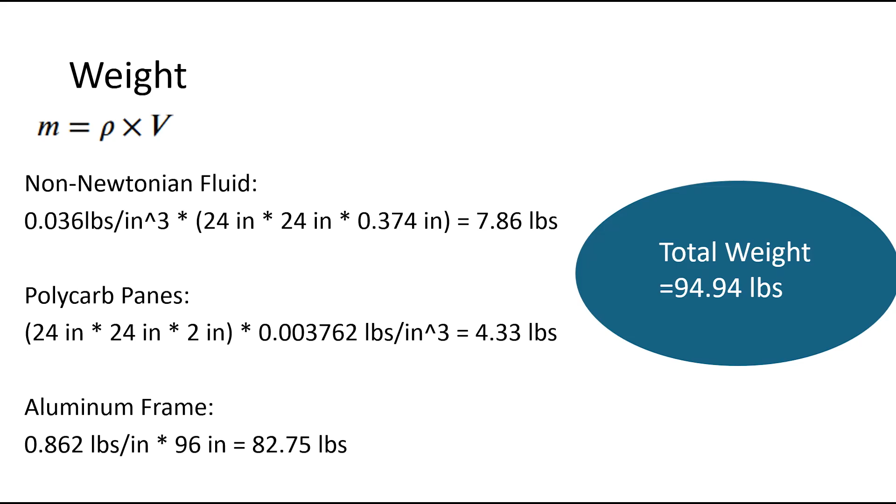One last question, you might have already said this — how heavy is one? Go back one slide. So we did the calculation — how do you find mass? It's just density times volume, so that's what we did right here. We saw the OSHA standard for a 2-person lift is 100 pounds, so we got right underneath the 2-person lift threshold.

And what's the cost of one module? So we sell these in a starter kit, which comes with 3 panes and a base. Our starter kit costs $5,000 compared to Total Shields, which is $45,000. Each additional panel we sell for $1,000 each.